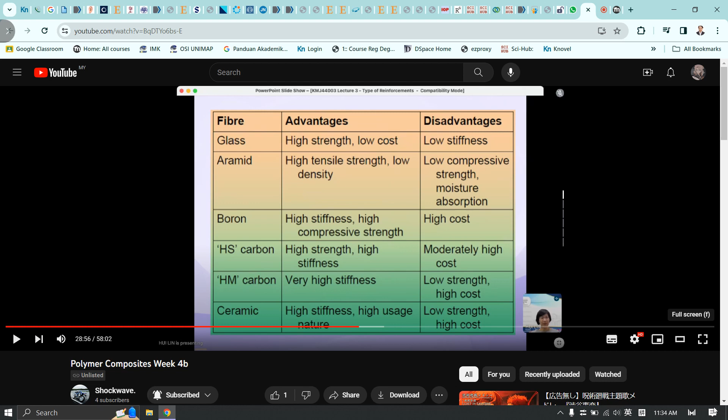For myself, I only have one subject, example, okay, one or two subjects, no? So I create the assignment and quiz. But for you guys, you have many subjects, right? And then you have to be very careful when you enroll, especially for the quiz, assignment, and sometimes the students have difficulty uploading their assignment in this e-learning platform and so on.

So please let me know, okay? If you find you have a difficulty, please immediately let me know. Because, for example, like Esther, I can't remember who, she texted me saying, Doctor, I haven't enrolled in the e-learning. Oh my God, because I do this manual key-in, right? I may miss someone's name. Although Sean gave me the full list, I have 36 students.

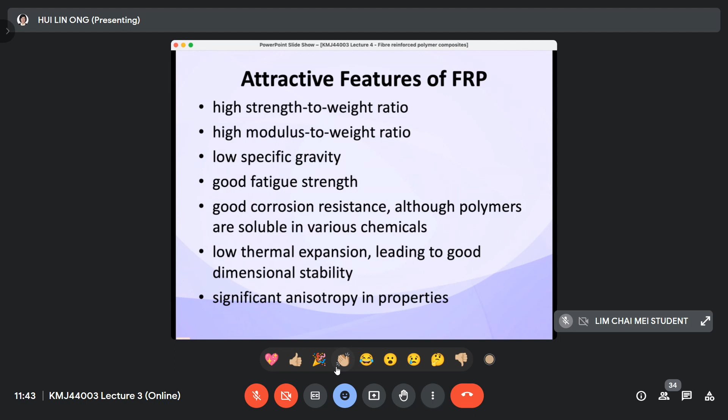I mentioned about the rules of mixture, right? In this topic, we're going to learn a very simple equation related to rules of mixture. Some students memorize the equation, and some smart students don't memorize it - they can actually come up with the equation using the basic theory that I'm going to share with you in these slides.

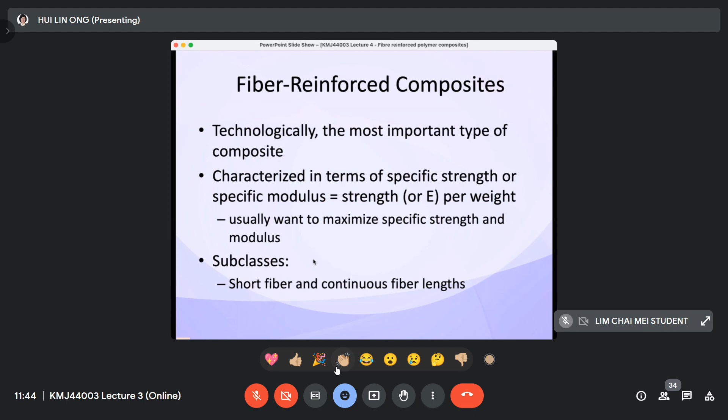Fiber phase, as we know, is divided into two types: long fiber and short fiber. Of course, small diameter and long length of the fiber usually makes them stronger. What we call aspect ratio is the length L over the diameter - they are strong in the sense that they have good strength.

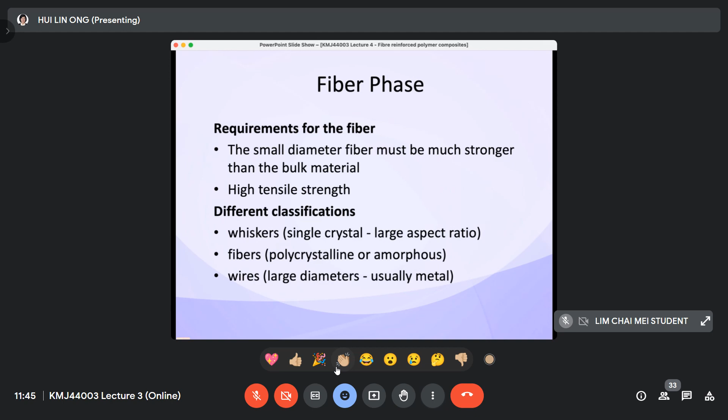What is the function of the matrix? In the beginning of the class when we learned about composites, it was very clear - these are all the functions of the matrix. In the quiz I asked where the force is being transferred. In the earlier classes I highlighted that the force has been transferred from matrix to fiber, from matrix to filler - that's the answer to one of the quiz questions.

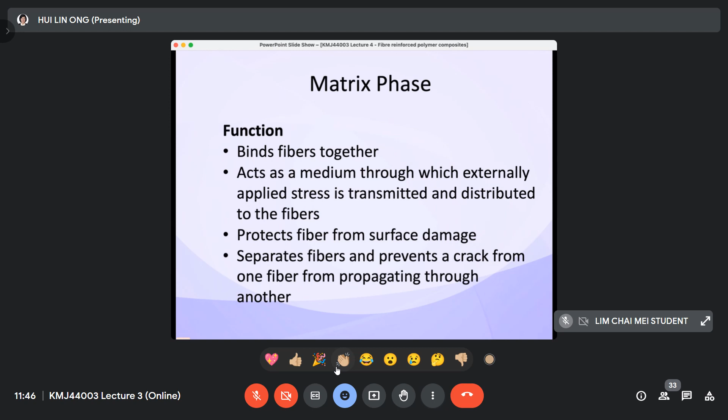The function of the matrix and the requirements of the matrix - I guess this is quite straightforward, so I will not continue it. The matrix must be ductile, so it has good ductility, meaning it has good elongation and is quite flexible, compared to the fiber which is not necessarily flexible - usually fibers are quite rigid.

With the combination of rigidity and flexibility or ductility of the matrix, the composite material becomes a perfect product. It has a lower E, meaning modulus. The matrix acts like a glue to stick the fibers together, keeping them in a proper position so the fibers can stand without spreading themselves, which is not good - they are being protected by the matrix.

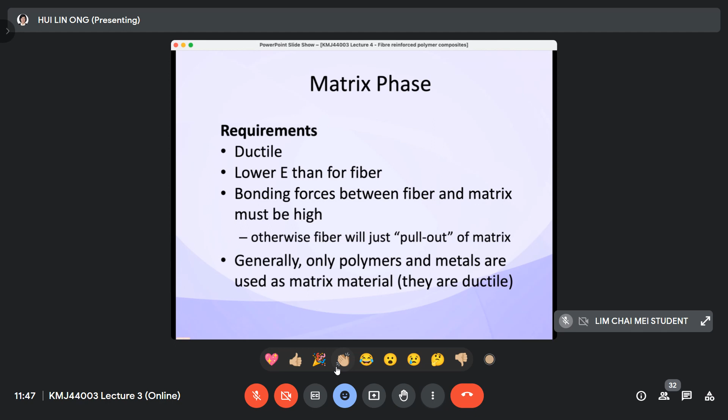Here the matrix we mentioned is a polymer matrix. I actually showed this picture before, during the physical class, about fiber pull out and the reason for fiber pull out - this is a repeat. So here you'll see the influence of fiber length. The mechanical properties depend on what?

Mechanical properties of the polymer matrix composite, or fiber reinforced composite more specifically, since in this topic we only learn fiber reinforced composite. The mechanical properties of this fiber reinforced polymer composite come from the fiber itself, and also from the interfacial adhesion between the fiber and the polymer matrix, which is very important.

The load is actually transferred from the matrix to the fiber, because the matrix is the domain of the composite - meaning the huge amount used in the composite material - while the fiber is the core. For example, 70% matrix and 30% fiber. This 70% becomes the main ingredient, and we say it is the domain.

So from here, you see if the fiber is long, and the interfacial adhesion or interfacial bond between the fiber and matrix is quite strong, then the strength of the fiber reinforced composite is also very high.

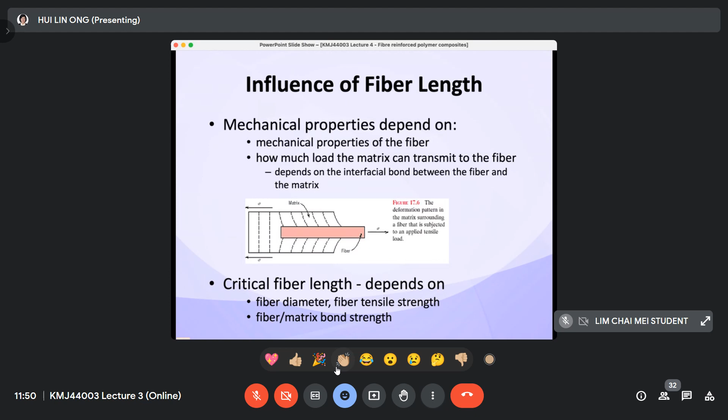Critical fiber length depends on the fiber diameter, the fiber tensile strength, and also the fiber matrix bond strength. It is simply a matter of these factors: either the strength of the fiber or the fiber-matrix bonding interaction - these two are the major ones.

Critical fiber length is usually denoted as LC. Since the load cannot be transferred beyond the end of the fiber, a critical fiber length likely exists for effective strengthening and stiffening of the overall part.

Like humans during normal times when we go jogging and nobody chases us - but suddenly a critical situation happens, like a tiger chasing us in the jungle trying to eat us, so we feel panic and use our full power to run. Similarly, materials under critical situations resist what's done to them and reach their highest power, which creates a dramatic stress increase followed by a sudden drop.

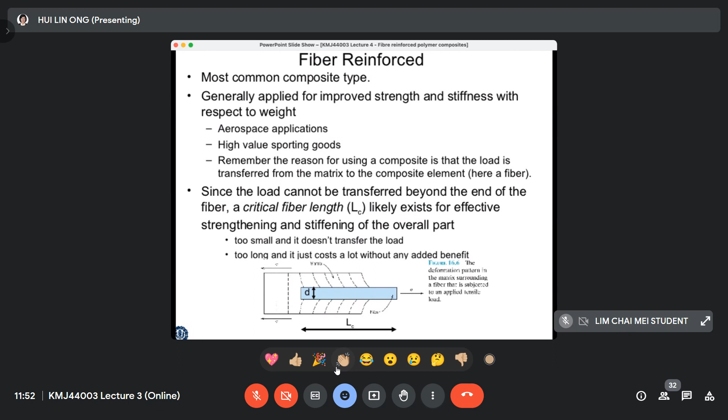I have a video to show critical fiber length. Let me finish this first, and then I'll find the video on YouTube so we can watch it together - it's a good online class talking about critical fiber length.

Critical fiber length, LC, depends on the fiber ultimate strength and diameter. This symbol here is tau, pronounced as a Greek letter. So this is tau C.

You can see my cursor pointing to tau C at the bottom here - either the matrix-fiber bond strength or the matrix shear yield strength, whichever is smaller. The smaller this value, the longer the critical fiber length will be. Therefore, the bond between matrix and fiber often dictates whether the fiber improves the property, with the fiber-matrix interaction usually playing the major role together with the fiber strength itself.

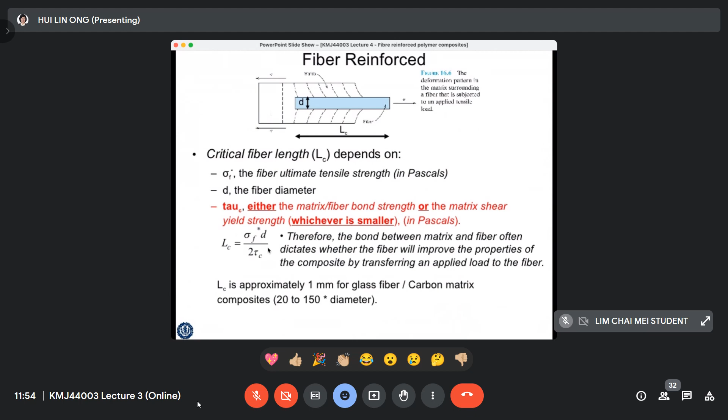Normally the matrix has a lower modulus, we know that. So to achieve an effective strengthening and stiffening of the polymer composite, the fiber must be larger than a critical length.

This is for us to do the polymer composite design. I think this design is for long fiber only - this only applies for long fiber. For short fiber, perhaps yes, but anyway this is for long fiber, and the long fiber has been arranged in a proper direction, either in straight uni direction or woven direction. So it has a well-defined direction now, the fiber.

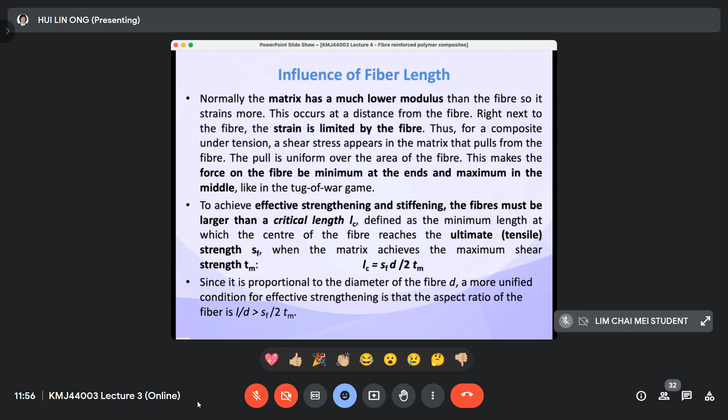Then we use this concept, we call it critical fiber length. So in order to know whether the composite can be produced with the strengthening and stiffening effect, the fiber length must exceed the critical fiber length. So that is why there is a calculation on it actually.

From here we will see the influence of the fiber length. So this is a continuous fiber - continuous fiber usually their fiber length is more than 15 times of the critical fiber length. So 15 Lc, more than 15 times of critical fiber length. So this is continuous.

A short fiber - that's why I mentioned, right? If you need a strengthening and stiffening effect of the composite, usually they are the long fiber. So the short fiber usually has a length lower than 15 times the critical fiber length.

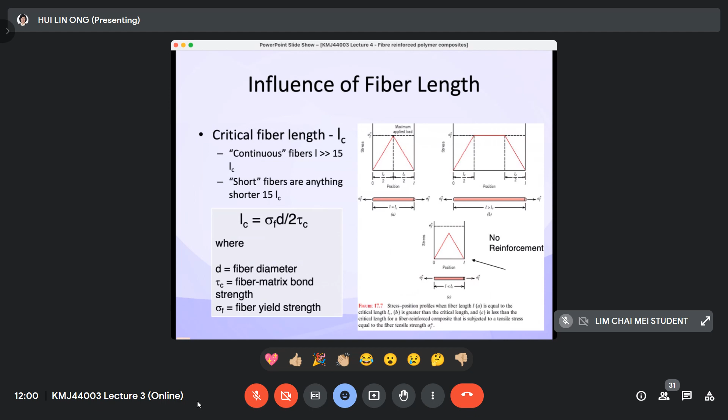First one, this is the influence of the fiber length. So from the influence of fiber length, we learn about critical fiber length, and this is the equation. Then the second factor is the fiber orientation. I think I mentioned this in our physical class as well.

We'll see this is the unidirection - this is the longer fiber, short fiber, a shorter one but still can consider. And in one direction - and this is the transverse, this is very short and oriented differently. So I have a question here, before we move. Example, this is one directional fiber reinforcement - the fiber goes to the same direction like this, right?

If a force is pulling from this side, see this arrow. The force pulling in the same direction as this fiber arrangement is force A. Force B is the opposite direction of the fiber arrangement. So which will give a stronger stress? Same direction to the fiber arrangement, or opposite direction, which will give higher strength at the different applied force direction? So, is A or B stronger? Let's vote now, A or B.

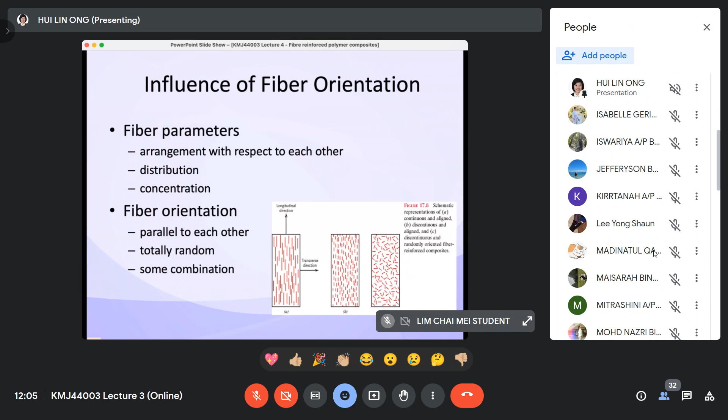The answer is A, not B. The answer is A. Perhaps your thinking is, because of the direction, you may think that

if the load is applied in the opposite direction to the long fiber, the long fiber will start to fight, right? That's why you choose B. Actually, in the transverse direction, the fiber length will reduce. In the same direction, the fiber length is even longer. So remember, in the same direction the fiber is very, very long. So when you pull it, you need higher energy to break it. But if the fiber is straight and very long, and you pull in this other way, this is only the diameter, so the diameter is shorter. So then the energy to break it is kind of very easy, so the transverse direction has lower strength compared to the longitudinal.

So we call this one stronger, this one weaker. So your answer is the latter. Never mind, you gave the wrong answer, but now you remember, correct? Okay, so you remember this? Good.

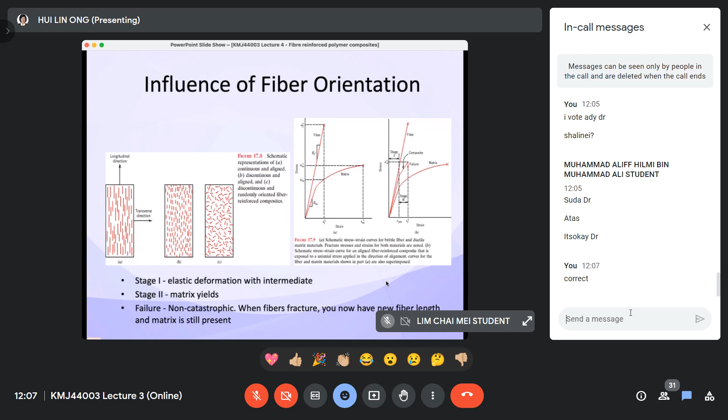So this one is the fiber orientation. Let's see, stage 1, 2, 3. Well, this is not very clear for this failure. Let me check about this along the fiber. Okay, so in short, just now I have explained to you, this is actually related to the critical fiber length again.

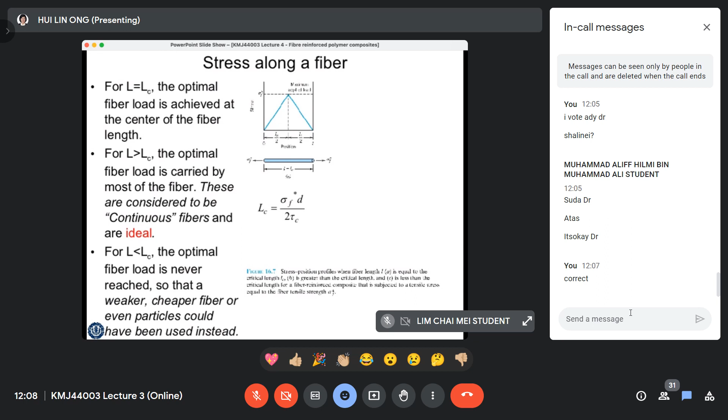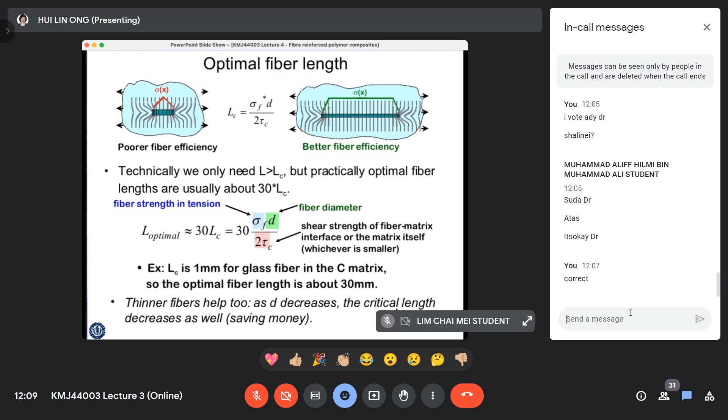If the force is in the same direction as this long fiber, it needs more energy to break them, because they have this high critical fiber length. If it is the opposite side, then the energy required is a little bit lower. This is what we call the optimum fiber length. This is 30 times the critical fiber length, so you can calculate whichever you would like to have. A thinner fiber will help too, as diameter decreases, the critical length will decrease. So I'll pass through this. The answer is same direction, and properties are related to the critical fiber length.

Again, just now I mentioned the length. When fibers are aligned in one direction, we call it one direction, so the material is highly anisotropic, meaning anisotropy is 1. So the property of the fiber reinforced composite is very dependent on one direction only. If the application is applied to that direction, that direction will give the best property, but the opposite direction will have a lower property. So it is a directional dependent material, I can say that.

So let's say we have a short fiber, and the short fiber is arranged randomly, without either aligning straight, or vertically or horizontally, or in a woven direction or whatever. Then the properties of the composite will not be influenced by the fiber arrangement because they are randomly arranged themselves.

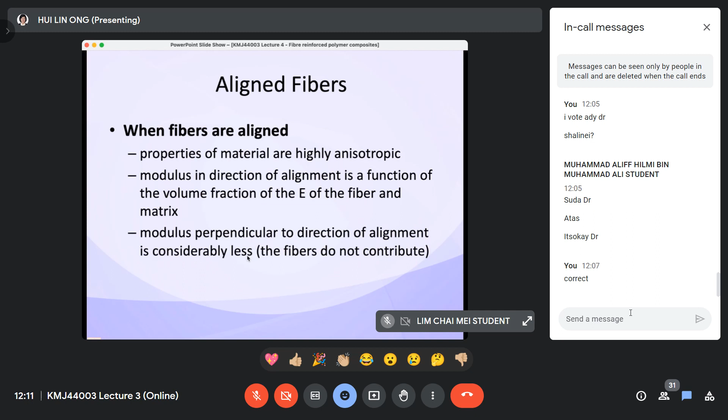So, modulus perpendicular to direction of alignment. Here we talk about strength and modulus, it is the same concept for modulus. Modulus in the direction of alignment is a function of the volume fraction of fiber, and modulus perpendicular to the direction of alignment is considerably less. Perpendicular is the opposite direction, so the modulus will be reduced as well.

Randomly, just now I mentioned randomly oriented fibers, the properties are not dependent, the properties are independent of direction. So whatever we pull here or pull there, the strength should be the same. Actually the strength should be the same, but anyway in reality it is not the case. Somehow it will be a little bit lower than the strength, or a little bit higher. Well, this is the reality, so nothing is perfect.

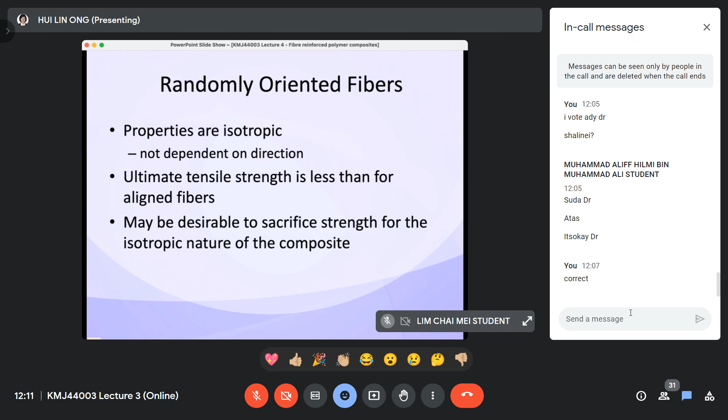Okay, so we come to this now, kids. We come to how to derive the equation. This is important. How to derive the rules of mixture. This is important, and the rules of mixture is only applied to fiber reinforced composite. It is not applied to other types like short fiber. This is only applied to long fiber, so just be very specific on that.

So we come to how we are going to derive the equation, and then we can predict the properties of the fiber reinforced composite, the long fiber, not short fiber. We consider, but we have some rules to consider. As you learn mathematics, you should be very good in mathematics, so all engineers should be very good in mathematics, right? But somehow I find I'm getting lousier in mathematics anyway.

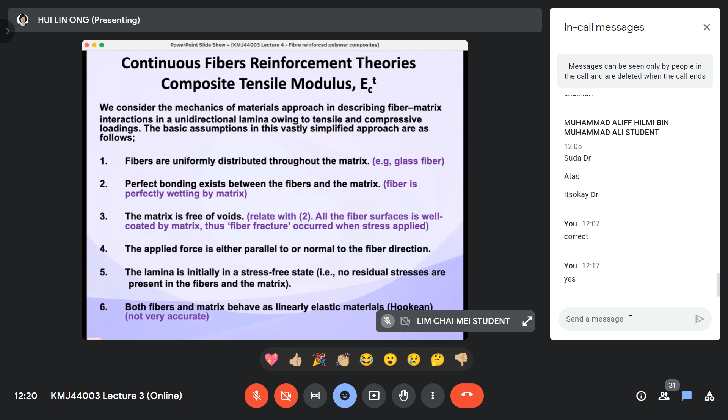But anyway, we want to put the rules of mixture to derive an equation - not necessarily a perfectly good equation, but one to help us do a prediction. This is just a prediction, kids. Prediction doesn't mean it's accurate, correct? So it just helps us do a prediction to help design a better composite material. This is what I can say.

Okay, so now we come to the first one. This is the rules of mixture. For case A, we would like to predict the modulus of the composite, the polymer reinforced composite, long fiber, where the force is applied in the same direction as the fiber arrangement. We call it longitudinal, or parallel, or same direction - I can use different words to say this.

So now, consider a composite model containing a certain fiber volume fraction. We use volume fraction, not weight percent, but after getting the volume percent, we can change it to weight percent. Here we focus on volume percent - like density equals weight divided by volume, so this is volume, the volume fraction of fiber, meaning it's unitless. It is formed from uniaxial aligned continuous fiber.

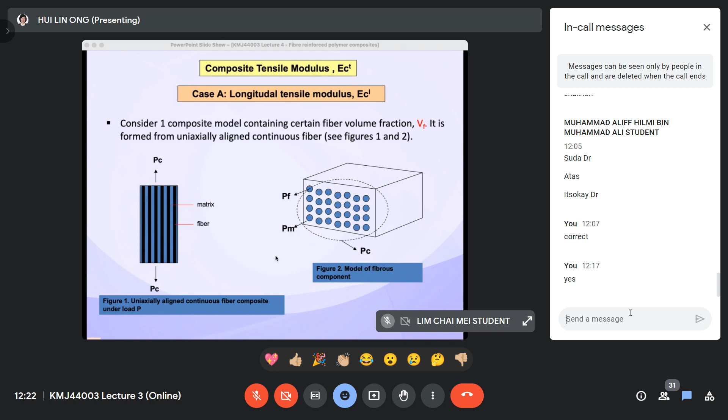See figure 1 and figure 2 here. This is a cross-sectional look of the composite - you see dots here. Actually, if you cut it like this, you see dots, but they align very well. And this one is cut another way around, so you see like this. The matrix is black color, the fiber is blue color.

Now come to the next slide. When the force is applied continuously, or in the same direction as the fiber arrangement, meaning that the elongation of the fiber is consistent.

Elongation of the fiber is consistent, meaning we call it isostrain. So the elongation of the matrix equals elongation of the fiber and also equals elongation of composite. Composite is a combination of the matrix and fiber, right? So in this condition, the fiber strain is consistent. There's no change, they elongate in a very systematic way. We call it isostrain.

EM equals EF equals EC. They're all the same, regardless of composite, fiber, and matrix. They elongate at the same strain. So we call it isostrain.

So the force of the composite must be equal to the force from the matrix plus the force from the fiber. So Fc equals Fm plus Ff. Then we resubstitute the force, changing it to stress times area. So we rearrange: the force is equal to area times stress. Area times stress of composite is equal to force.

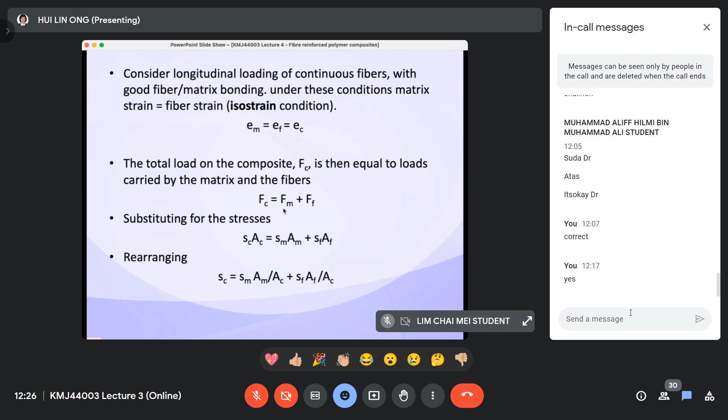Then we can replace this as C, right? So the stress of the composite equals the stress of the matrix times volume fraction of the matrix. If you go back to this volume fraction of matrix, and this volume fraction of fiber, we simplify this. So SF, VF - sorry, this should be VF, missing one F here.

So then we can already predict the stress - it can be yield stress, we can predict the yield stress, or this can be tensile strength, or this can be fracture strength. Long fiber, same direction - anyway, it's just tensile, not fracture.

So each time, we can predict the strength of the composite or the yield strength of the composite, equal to the strength of the matrix itself times the volume fraction of the matrix, plus the strength of the fiber itself times the volume fraction of the fiber itself. So this is a pretty straightforward equation.

In another way round, the stress is equal to strain times the modulus, right? So we substitute this little E inside, substituting SC, SM, and SF. Then we can actually predict the modulus of the composite, equal to the modulus of the matrix times the volume fraction of the matrix plus the modulus of fiber times the volume fraction of the fiber. This is when it obeys Hooke's law.

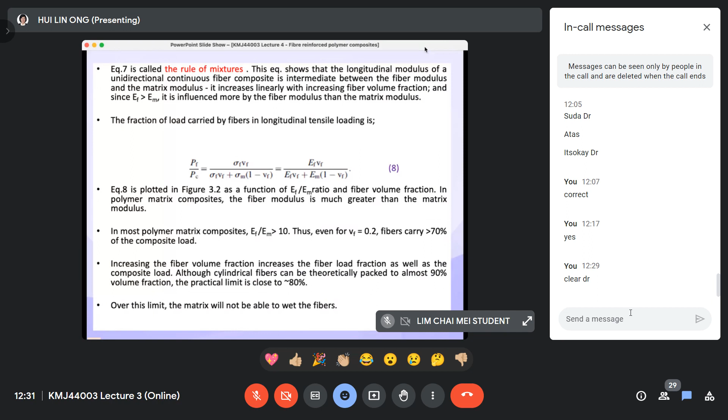I'm not going to talk about this, let me check what this is, kids. No, this is the perfect bonding, this is isostrain. Okay, ignore this slide, I'm sorry. They are kind of... okay.

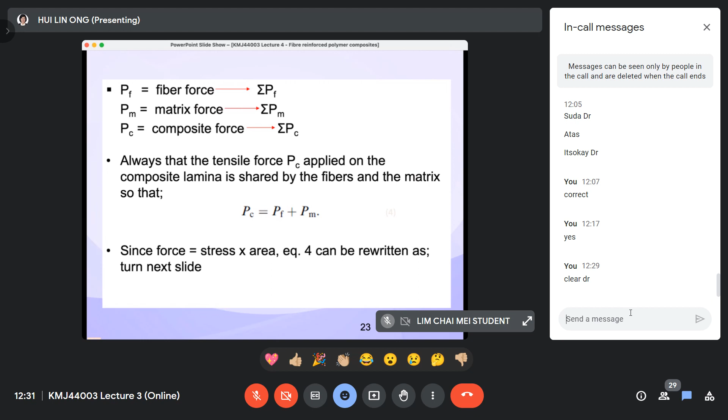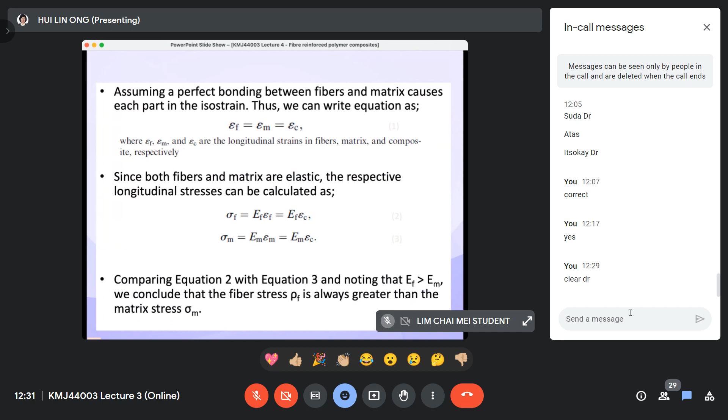Okay, now I'm going to tell you another one. It's actually, we call it... it's not isostrain, but isostress, but perpendicular. Let me check, we have... not yet now. So kids, I think I have to delete this slide, it makes you very confused. I tried this, ignore it, this is quite confusing. Just remember the before one, I find it simple. This one makes you confused.

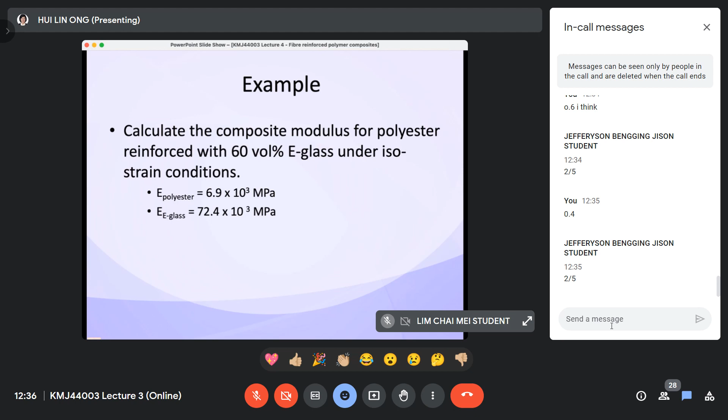So this is a kind of very easy question because the answer is under isostrain condition. So what you just learned, under isostrain condition. Okay, so clear? Just one example. Now we move to the second equation, also the last equation. Okay, I'd like you to derive this.

This is a little bit difficult, but anyway it is doable. How about we now calculate the modulus opposite to the force applied, opposite to the fiber alignment. So we call it transverse or perpendicular.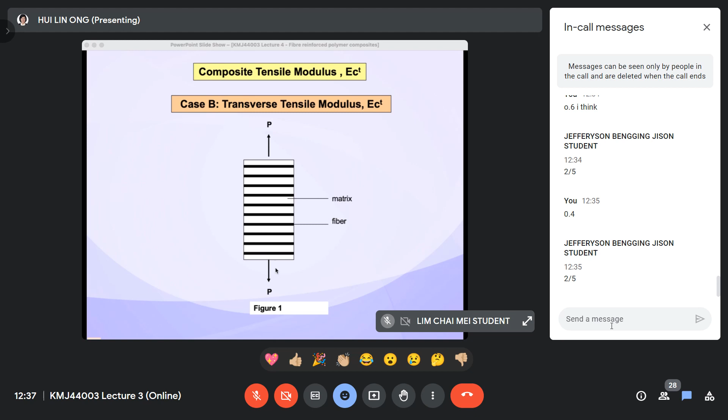Okay, so like this, this is the fiber arrangement, and the force is opposite to it. Then in what condition? There will be something similar as well.

In what condition? Just now we learned is isostrain, so the elongation is the same. But now when it happens on this opposite side, we can say it is an isostress condition. Each layer is perpendicular to the direction of loading and has the same area of the load, because it's counted as area. It's no longer the length considered.

So each layer carries the same load, experiencing equal stress. They have the same stress, meaning the stress of the fiber equals the stress of the matrix and equals the stress of the composite. So come, start with this: same stress.

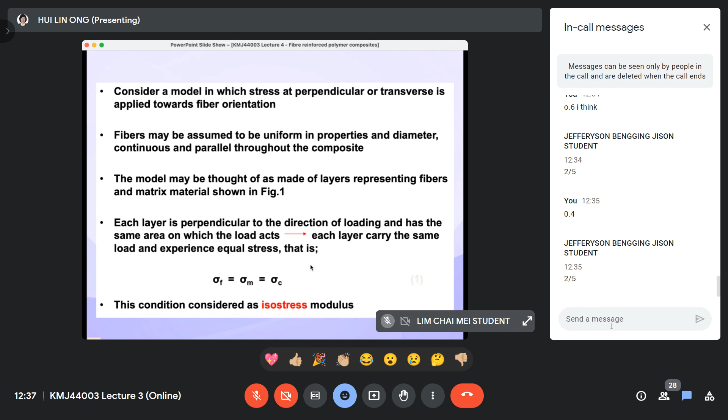So from here we have the strain. So we have to replace the stress into the strain.

The total strain of the composite is given by this, this is composite, no? Okay, this has been simplified. I think I don't have another way. I don't want to make you confused.

Then I'll give you something to do, not a quiz, just for you to practice. Okay, so it has been simplified. The stress per area is the same thing. We need the area, just like you learned previously. You apply it.

Then you get this: the strain of the composite is equal to the strain of the matrix times the volume fraction of the matrix, and is also equal to the strain of the fiber, so you change the stress to the strain and the area. You understand, right?

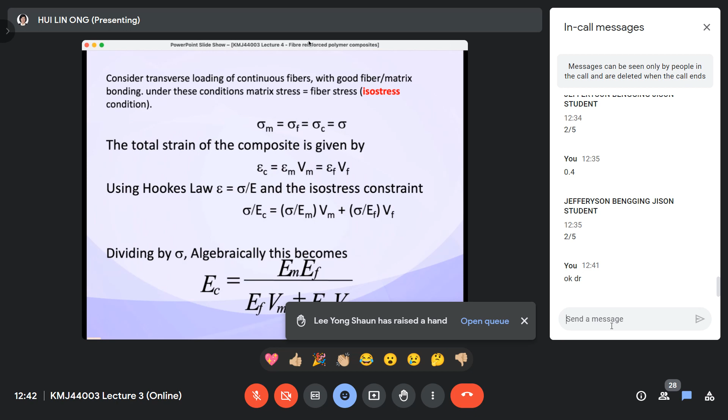Let's talk about this. So we learned about these two rules of mixture from these 2 equations. And I have to repeat, these 2 equations are useful for long fiber reinforcement, not for short fiber. For long fiber reinforcement, we can get more information from the longitudinal loading rather than the transverse loading. These 2 equations fall into the rule of mixtures.

This is a traditional polymer composite design equation. Anyway, I find out there are not many people using this anymore, due to the advancements of polymer composite — the fiber reinforced composite technology has become so matured, it's quite common knowledge in the industry now. And this is the basic that we usually teach students, at least so they have this mindset: the history of our subject comes from concepts like this.

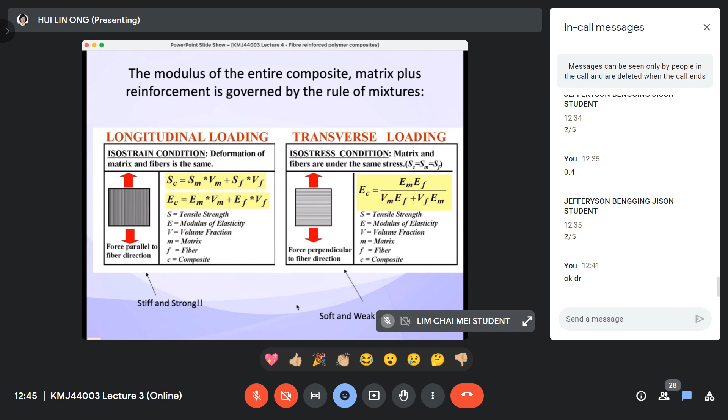This is interesting - I raised some questions to students before. This is for us to think of. It's not 100% wrong or 100% right. In the calculation we use volume percent, the volume fraction. But in reality, in the market, when they sell the product, many of them actually use weight.

They use weight to sell the product - the weight of the fiber, the weight of the polymer. So we have to convert the weight to volume before we can apply this equation. So it's not straightforward in the practical world. I cannot say it is totally right or totally wrong - this is just the trend in the market right now.

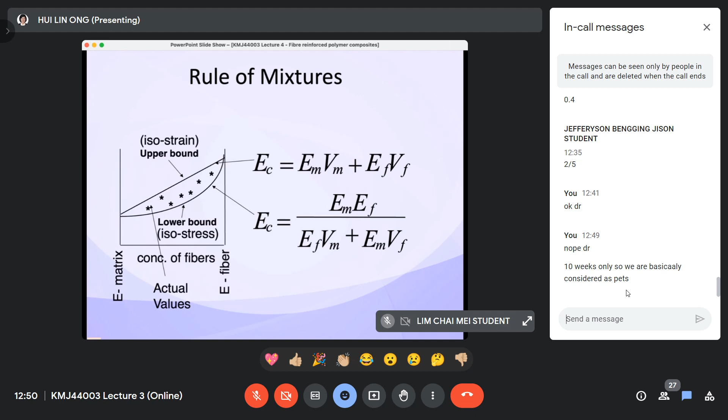Okay, fine then. So here is a repeat kind of thing. I have this quiz, no? I'm not sure whether I want to give you the quiz or not.

Talk about these mechanical properties and hardness of polymer matrix composite. I believe you have learned this quite well.

These are all about the short performance test. We call it short performance test - the tensile, the flexural, the impact - they are all short performance tests. Meaning that you will get the result immediately, just maybe a few seconds to a few minutes.

Upon the failure of the composite material, you will get the result immediately, after a few seconds or few minutes, and the composite will be all destroyed. So the material must be destroyed - it must break into two, or must be broke. Then only you can get the result.

But anyway, somehow some interesting part happened to us, right? You remember when we were in the classroom? I remember during your second year, we go to the lab. You remember or not? We do the flexural test - the material did not break. Do you still remember when you were with me and with Dr. Nasri

about the subject in your second year, polymer structure and applications? You remember that? Then we go to the lab, then we do tensile, flexural, impact, hardness - we do 4 tests. I still remember, and then something bad happened to me with the technician, and then you guys felt, how come he's so rude to me? You remember that?

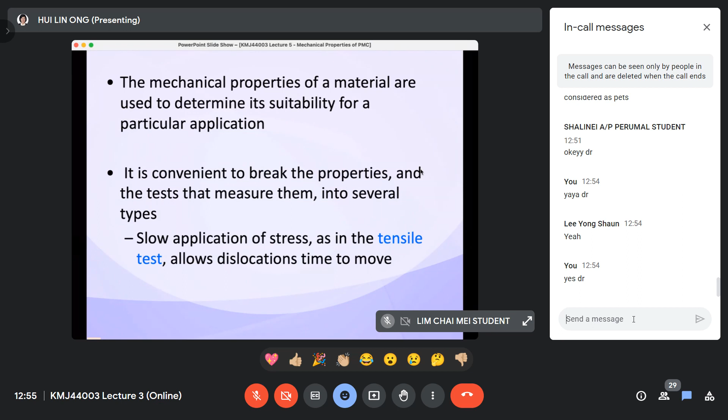Okay, so the result of this, we call it short performance test. Short performance test meaning that you can get the result in a short period of time, example, in a few seconds to a few minutes only. So that we call short performance test.

And these tests that you have performed, they are destructive tests. You're going to learn non-destructive tests later. So they're called destructive test - meaning your material will break.

Now we talk about this. I'm not going to repeat the impact or whatever because you have learned it. Now we need to talk about these three things: fracture toughness, fatigue, and creep.

Especially fatigue and creep - they belong to the long performance test, meaning it will get the result in a few weeks, months, or a year. So it's kind of a very slow motion test that will be performed on the polymer composite material, and it is very commonly used for metal material - these two are very commonly used for metal material.

Okay, these two are long performance. Fracture toughness is not, fracture toughness is short performance. Fracture toughness is actually to know, to measure and to determine how good the material can resist failure when there is a crack happening on the composite.

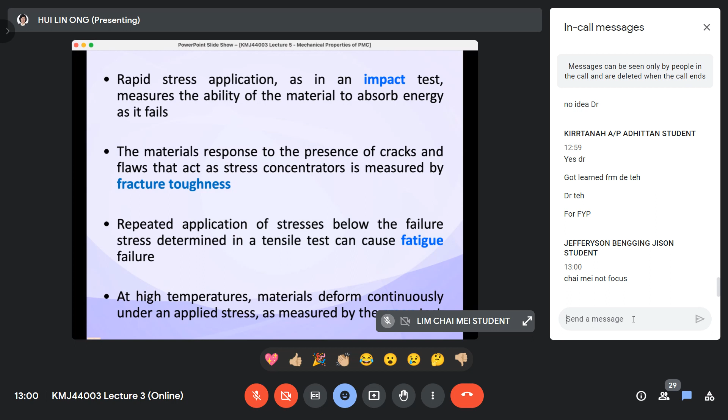Okay, so we stop here. So in this topic, I'm going to focus on only three things: fracture toughness, fatigue, and creep. Because the rest you know quite well, so I'm not going to repeat it. Some of the slides here are for your revision.